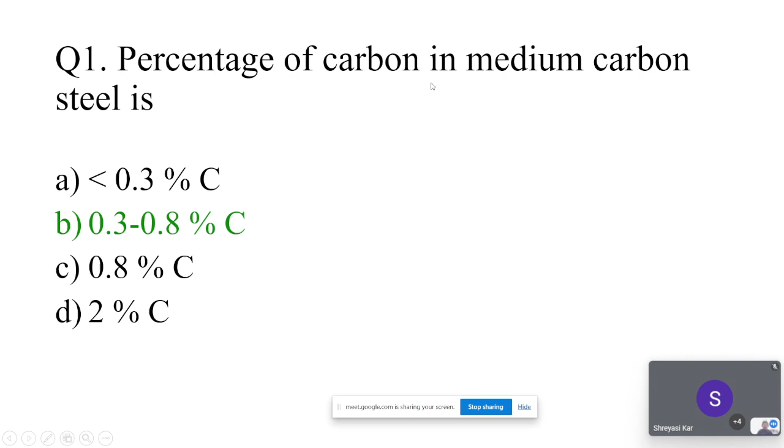What is B? You know about the percentage of carbon in medium carbon steel, that is less than 0.3, it is different. It is given in that slide itself, at what amount it is for medium carbon steel. So again, nickel is added in the steel to improve this. This is mostly a problem solving session for you, about what kind of problems can be asked in assignments, and any doubt you have is about that only.

This similar kind of question might be asked in exams and in assignments also. So our main motive is that you should get to learn. So if mostly you are here to answer, your strength and hardness... you need to see the actual answer is strength and toughness, not hardness.

This is the tricky part. You need to be very particular about your answers. Toughness is more important, this can be added using nickel. It is given in the chat. As it is a theory subject, you need to be focused on what kind of theory and properties are given in it.

So you need to be focused on the theory part. Problem parts are there, but these kind of theory parts, what can be added, these things are fixed. These are done through research. So you need to keep these things in mind. There are only a few materials that can be added, so you must keep in mind what kind of properties this material should give.

They are different, like chromium, molybdenum, vanadium. They have specific properties when they enter into the atomic structure, the molecular structure we have, the spheres. It changes their distances, the planes and slips. So it creates that kind of particular microstructure to support the specific properties.

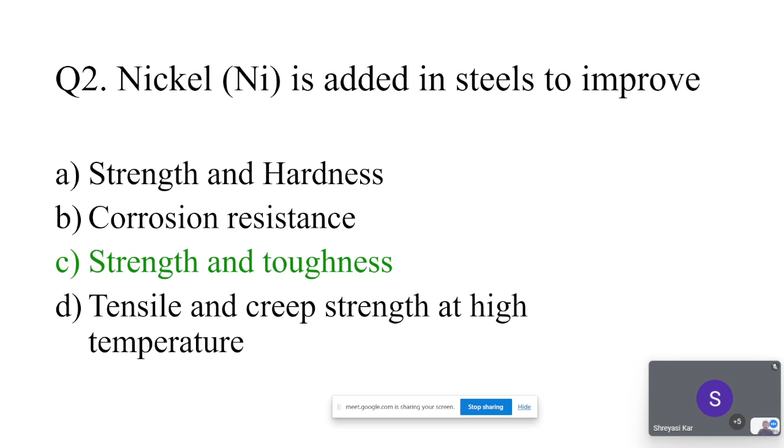This property - we need to go further in research on how things are working behind it. Okay, so let's move to the next one, I will answer this question in the next session.

This is the major alloying element in stainless steel. Yeah, it's right, mostly chromium - it is about 11%, I think we add it as a major alloying element in stainless steel. It is actually used for corrosion resistance. It forms an oxide layer, and due to this it can act as corrosion resistant. It is called stainless steel because mainly it should not be corroded. So again, this property must be taken into account - yeah, chromium is correct. So, fourth question now.

Yeah, shock and wear resistance, because it is a tool. Yeah, it's correct because it is a tool. Mostly in case of a tool, it needs shock and wear resistance because it needs to scratch. Again, the hardness part comes into the picture - it needs to scratch the material to tear the material. So all the other options are not even close to that. Shock resistance is the correct answer.

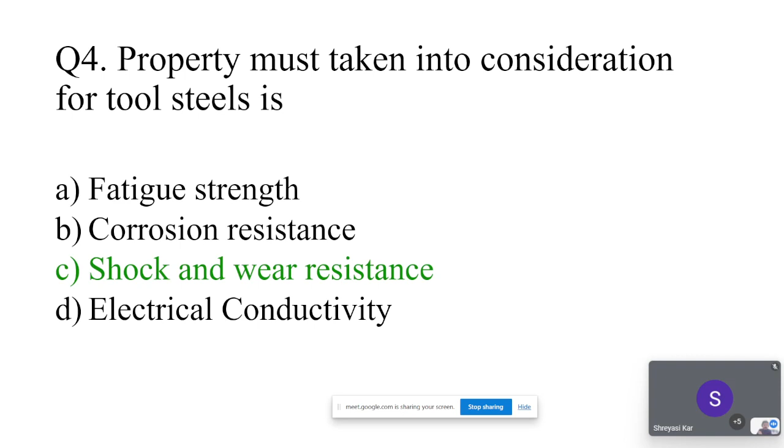We should aim for maximum efficiency and minimum cost, so our energy input should be less and our product output must be maximum. That's how we should work, and for that we focus on specific things. For specific properties, we think about how production should be maximized - that's what a production or manufacturing engineer should do with the resources available in our company or shop floor. Specific properties are given for specific tools, like in the case of tool steels, to get benefit for those specific operations - it's the shock and wear resistance we are using.

Again, the percentage of silicon added in steel is for enhancing the electrical properties.

Yes, that's correct. In manufacturing, this kind of problem is mostly asked because it is memory based, but there are small tricks you should understand since this is material science again. In material science, most of the research has already been done, so these kinds of tricks are available. You have to go through that domain to increase production when we think about these areas.

You can search it now even, but it depends. This kind of problem mostly comes in exams, and mostly we have to learn it. How the exams will be is a different part, but what's more important is your understanding from the questions or the lectures you've gone through - that is more important, that is about your learning.

So you can even ask a doubt if you want. Where is this graph - this kind of steel used with high silicon content - where is it, for electrical and magnetic properties? Is it in marine industry hatches, where they get magnetic and electric material drawn from the hatches in ships? The hatch, large - no, not the hatch, but the hooks along with cranes, where there are electrical and magnetic materials like semi-finished iron billets to pull out of the hatch and drop on the port. Is it like that? No, no, no. Where is this kind of steel used, with that high silicon content? That is my question.

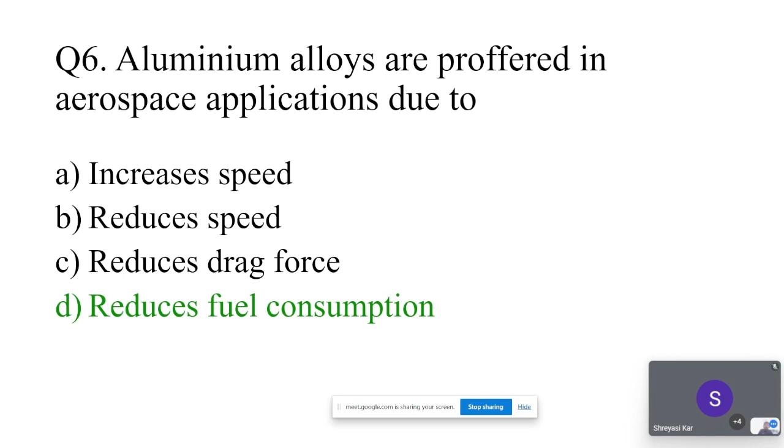That's it. Mostly the problems here are designed based on the assignments you have, so I'm not going too deep into any area. This is just the section to clarify facts. Again, this is a theory part only. The major problem with titanium in its molten state is...

It is chemically very active. I think you're slightly slow, are you searching or what? I'm not getting it, but don't search right now, you can search, but similar kinds of problems will come in the exam, so be ready to that depth so you can score more.

Also, we are mostly working to make sure you're more engaged with such small things, so you can learn more and grab more from the classes taught by the professors. Think about what mentality a manufacturing engineer should have, so we can select the proper material with the proper properties needed. The limitations and advantages of each material differ, so check what fits best and what the limitations are, and whether the material can be manufactured on shop floors or in manufacturing fields or not.

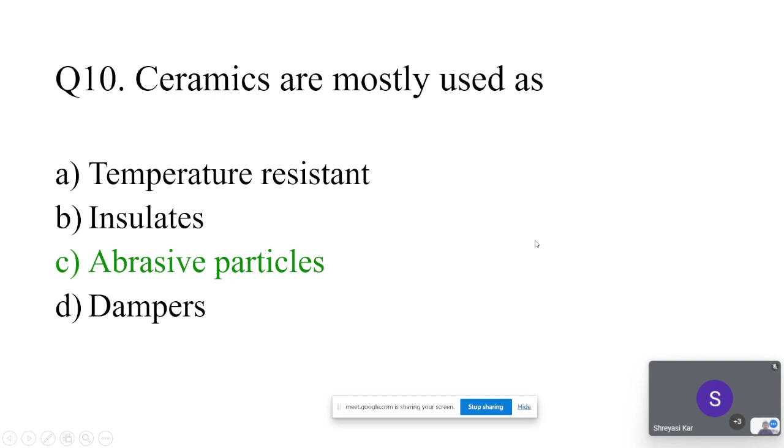Yeah, it's correct. It's carbon. Carbon is correct.

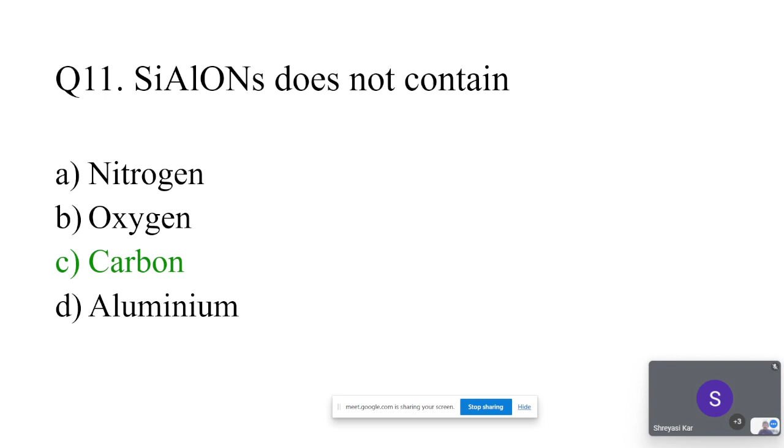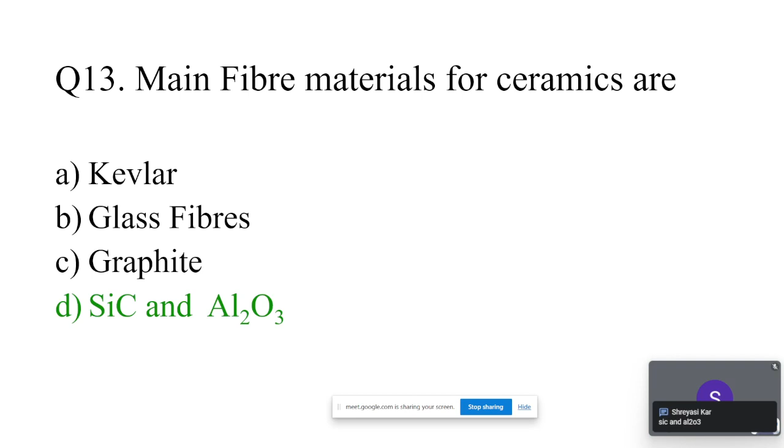So for finishing and milling, which will be the favorable property? It should be brittle. Finishing is mostly scratching metal. How would you be scratching in finishing? This finishing is mostly a grinding process. So in case of grinding, these things will not be applicable. Ductility is not at all close to it.

And milling is again a different property, different case. It is a machining problem, finishing is a machining process. So ductility is completely different there. In milling, it's mostly by cutting the material, so ductility is not part here. Mostly it's useful for how much it can deform. What is forming? Forming is you are deforming the material.

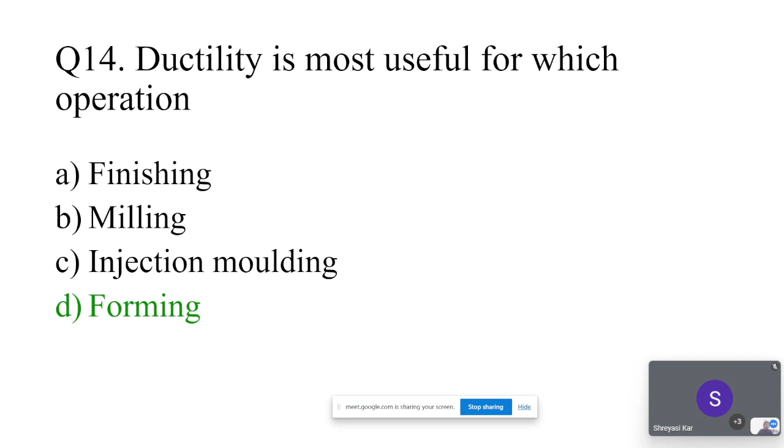That's how we can remove it in the form of chips. In milling we are doing it in the form of chips, and in injection molding it is again a polymer case. So only in case of forming does ductility come into the picture. That's it. So yes.

Yeah, it is hardness test actually. Izod is a hardness measurement test. No, not hardness, what is this? Uh, toughness. It is actually measuring how tough the material is. Impact test, Izod test, we are actually scratching the material. Like I think people know that sir is actually asking how it can be actually like this.

There is a notch, I think so. This impact testing checks how much stress. It is actually at the center, right? Not the center, it is actually half, and the rod is placed from this side, to check how much fracture it can withstand before it completely breaks. It is the Izod test actually.

So such kind of test we use for toughness measurement, not hardness. And these are like how we can measure hardness by scratching the material, using different indenters to scratch and check the level of scratching. So different scales are there like Rockwell scale, Vickers scale, scales like A, B, C. Depending upon the scale, we can know how much hardness it has.

Is this Knoop test same as the Rockwell test? Maybe internationally it is made differently, the indentation is different. In case of Knoop, it is completely square, like a rhombus like structure. In case of Rockwell, it is different. For Vickers, I think it is a cone. For Rockwell we are using a ball, and here we are using a cone like structure. For this one we are using a rhombic structure. It depends upon different indenters.

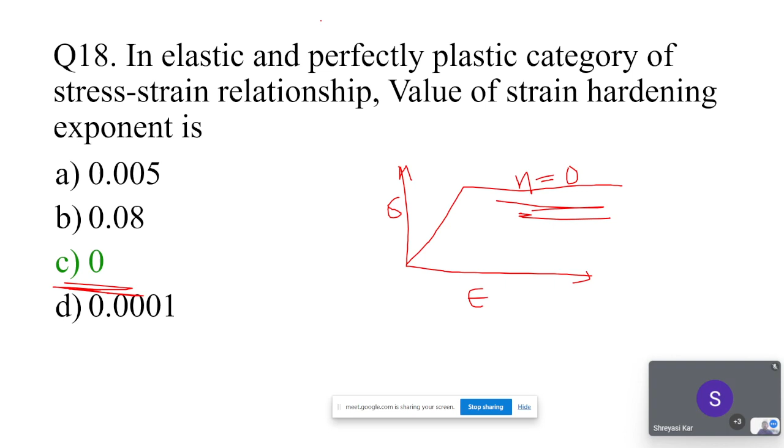So in the stress strain graph, what's the reason for the drop after the yield point? What is the case there? The elastic and perfectly plastic category of stress-strain relationship, you have to check everything. It's preferably mentioned here, what is the category? I think you need to refer to the slides again, it is in the second slide, third slide I think. It is a specific property in the elastic and perfectly plastic category of stress-strain relationship. It is the specific category that I have mentioned. From that mentioned category I am asking the question. That is the concept here.

Okay sir. Okay. Okay sir.

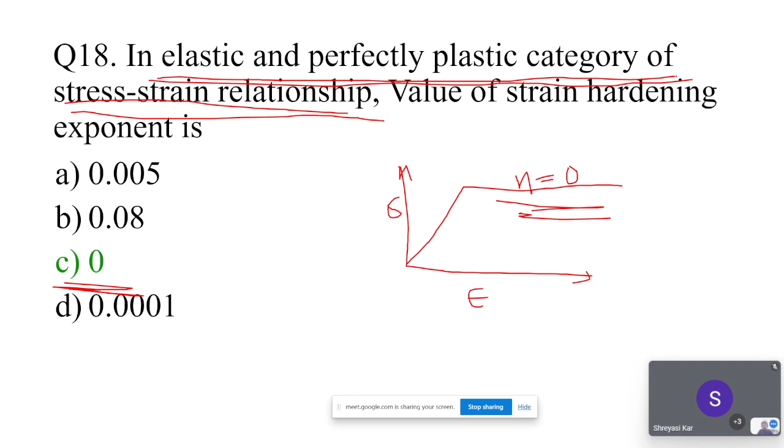That relation came from the formula, G and E formula, 1 plus mu. I don't know that actually right now, I'll go through slides only - you have to check that. Right now my focus is to get at what the relation is, not how it came about. You need to go deeper to check how it is actually coming, but right now I can't go beyond the slides. Since this is just an introductory section, there are many things you will need to get afterwards. If you go very deep at first itself, it becomes very hard afterwards, so we are slightly increasing the level.

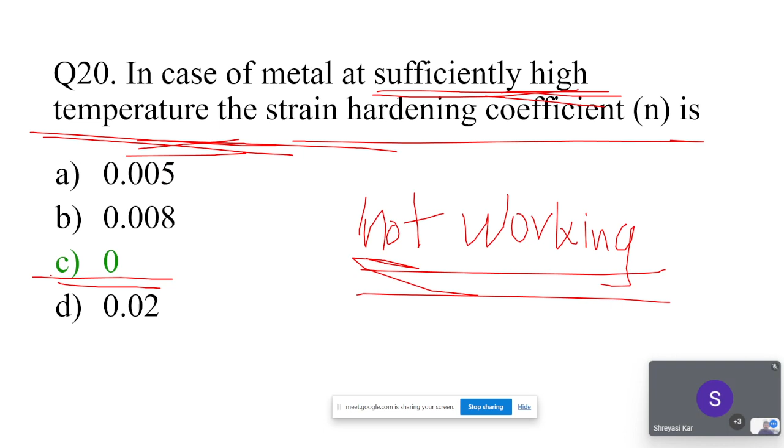Again, when we are working with materials, it comes to testing - how the test will be done. Again, this is a more typical question, it is not straightforward, it is a kindly difficult question.

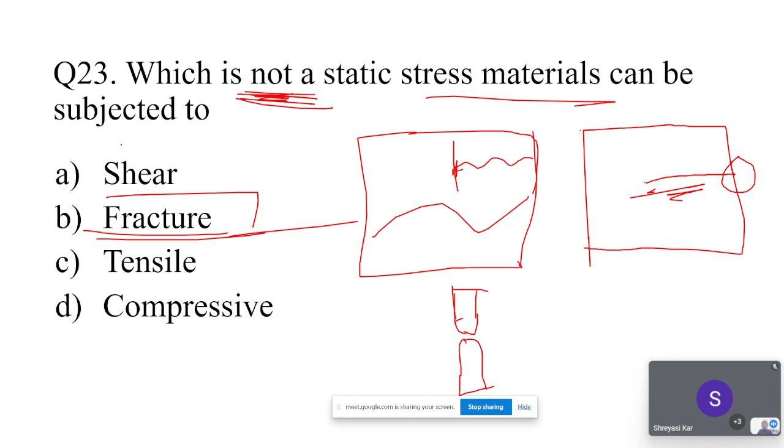Yeah, it's kind of fracture - while making also there is fracture, after making there is a fracture in the material. So the cup and cone fracture - this kind of fracture will happen. So this fracture is not a stress in the material, not subjected to such kind of stress. It is only shear, tensile, and compressive stress, and this is the fracture that you result.

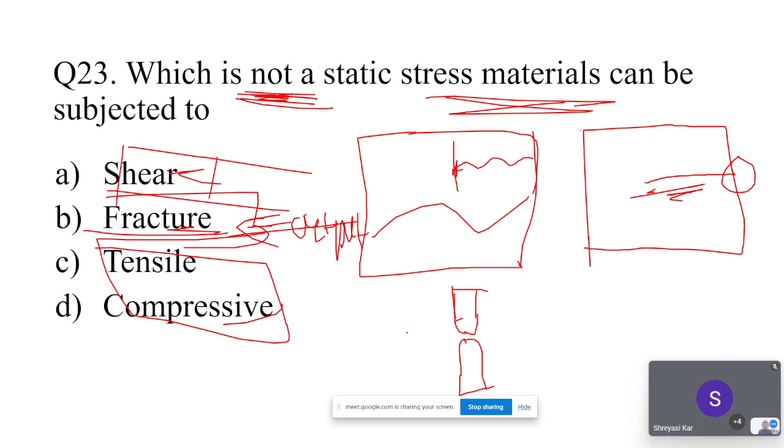The shears are actually the reason or cause for how it is happening, and the fracture is actually the outcome - that is the result of it. So it is not a stress, it is actually a result of these stresses only, and only these stresses then the fracture will happen - some kind of tensile, compressive. So this will be mostly your output actually, this is your output, and these are your inputs - these inputs are actually causing these things. So these are the different things you can specify, how it can be differentiated - this is the output fracture, and these are the inputs. So with these inputs the fracture can be possible. Fracture is there - mostly this kind of fracture happens due to these things only. This is the fracture, the correct answer.

Okay, so we are moving towards the problems now. This kind of problem will only be available mostly there in your assignments also - this kind of problems are there. So I think for 1 hour, I think we should go with this only. You can - this is not that much, but these are the important things. Most of the things are covered by the professors, I've gone through the video lectures also. So these are the things that we have, because this mechanical subject is always about calculations. What we suggest is that it's about calculations - how the things are mostly about theory and practice, it is, but it is about calculations.

Mostly in case of GATE, there will be a scale that the answer should be in, in this specific range. This is followed in NPTEL also. The answer will be within these limits, like 0.5 to 0.6. If your answer is within that, it is correct; if it's out, it's wrong. In GATE it is exactly like that, it should be between a specific range. Your NPTEL exam, assignments, and exams are examples like this only.

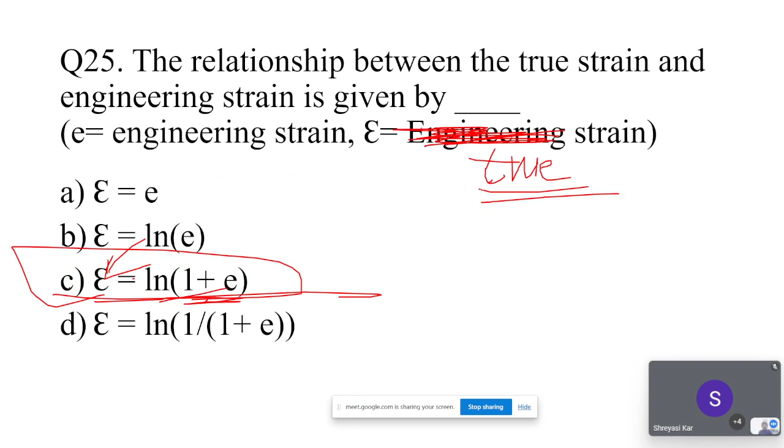And the answers will mostly be given, so it is not mentioned over here, it's in megapascal. I'll give you the answer in megapascal. No, it's too... In this previous case, it was just strain, so it doesn't have any unit, so unit is not mentioned over here. Again, when we have stress, we have to give the answer and measure the unit properly. The unit must be given there.

You people are solving or not. That is one.

What do you have? You have length, diameter, force, and elongation. So what do you need to find? True stress in this case. How can you find true stress?

So there are two more people. How can it be solved? I have to solve for you too. So this is 40 millimeter length, 8 millimeter diameter, subjected to tensile load, and 500 force. So what you have, engineering stress, you can calculate.

Your engineering stress will simply be F by A. What is F by A? Simply your 500 divided by pi by 4 into D square, the area of cross section. So it's simply 500 divided by (pi/4) into 8 square. So it came out...

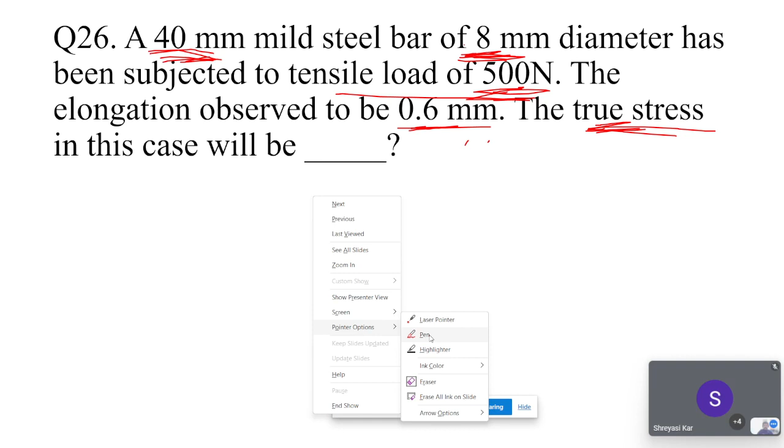You know the relationship also, you have to equate everything. Most of the times in GATE, such problems are given so you apply everything — every bit of knowledge you have, you must apply. So if you start writing with the formula you have and see how you can reach the solution, you need to check, but you are mostly just wanted to reach the solution. That's it — mostly you got engineering stress now, 9.94.

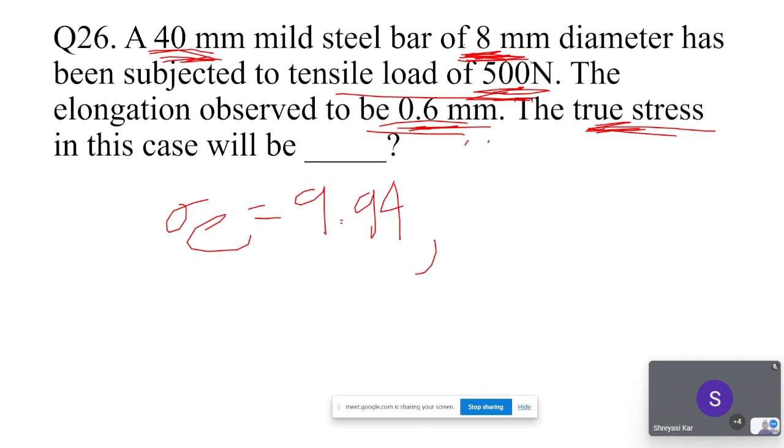And after that, elongation is given here, 0.6, and it's 8 actually. Elongation is given, that is 0.6. So what will be your strain? The engineering strain.

Engineering strain will equal this given value, 0.6, which is mostly final minus original divided by original. So it's 0.6 by 40. So again it will be 0.015 something.

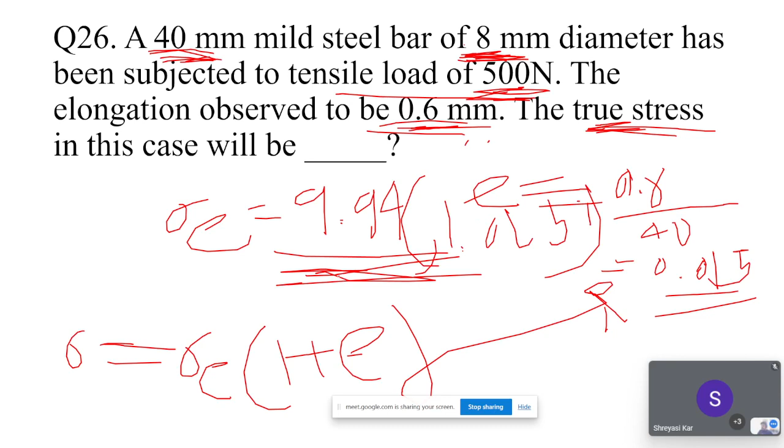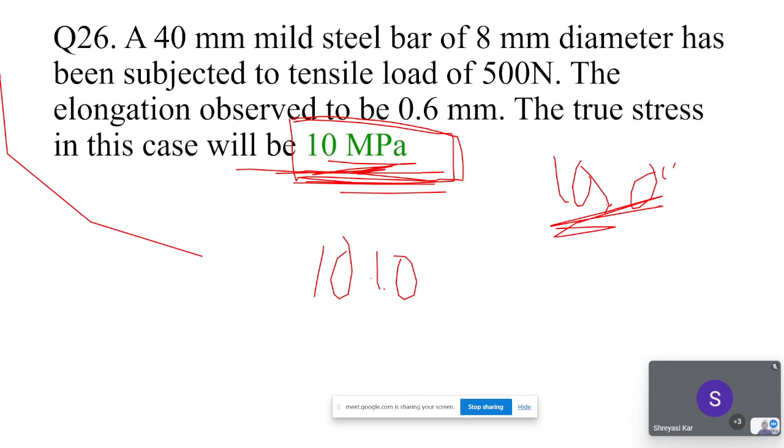And you know the relation from it: your true stress is equal to engineering stress into 1 plus engineering strain. So this is your engineering strain, 0.015. You have this, and this is your strain — just put, add, and multiply. That's it: this will be 9.94 into 1.015, which will be 10.10 something. That's how we can solve this. You have to apply everything you know. The answer is 10.10 something in megapascal — you also must mention units, units.

And this is another problem, which is transverse rupture strength. We must know the formula for this. It is the output of a bending test, from the bending test actually.

The length is given, just write what you have: you have length, breadth, thickness, and load, and you need to find TRS — it's not mentioned in megapascal. It's about how it is the output of a bending test. The bending test mostly has a cross-sectional area that resists the bending. It is about the formula, which can be resisted by your cross-section area, so you have to take care of the cross-section area too, and how the bending will happen.

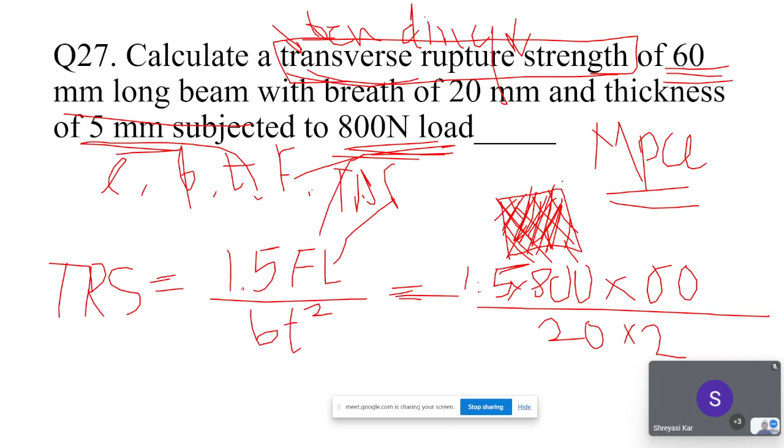1.5 into F, F is 800. So into 800, L is 60, divided by 20 into 2 raised to 5 raised to 2, 5 square it is, so it is 144. Simple calculation, put in this formula, this is the answer.

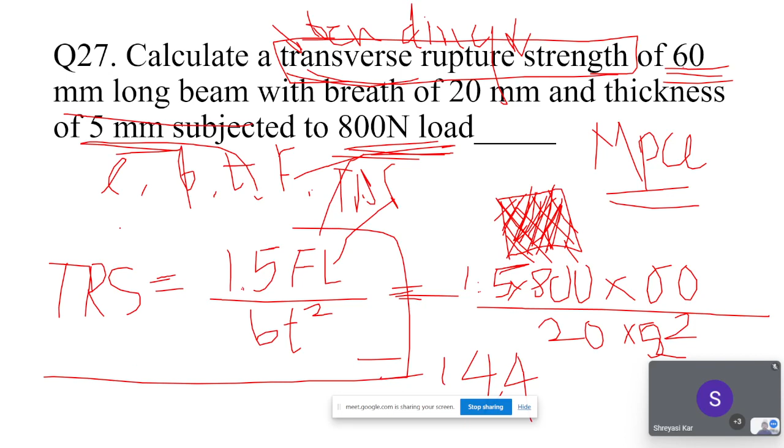This one is kind of tricky, slightly tricky question. This kind of question we have to complete in exams.

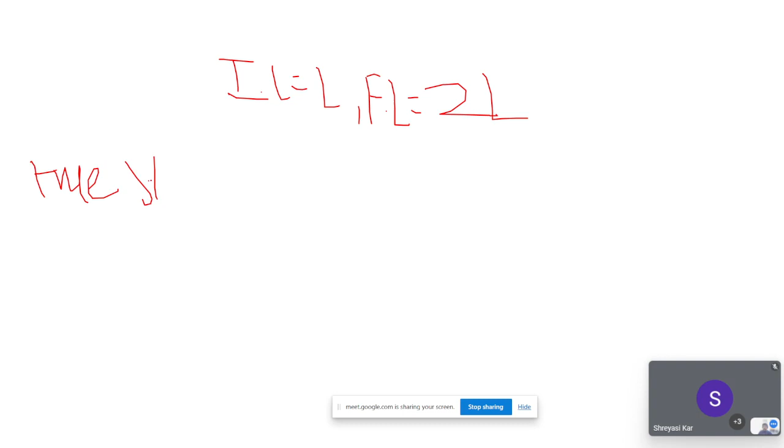Just apply the formula, you have to apply your engineering strain, true strain and engineering strain. What is true strain over here? Just apply the formula for true strain, is equal to ln of L final, which is 2L, that is final length, final length divided by

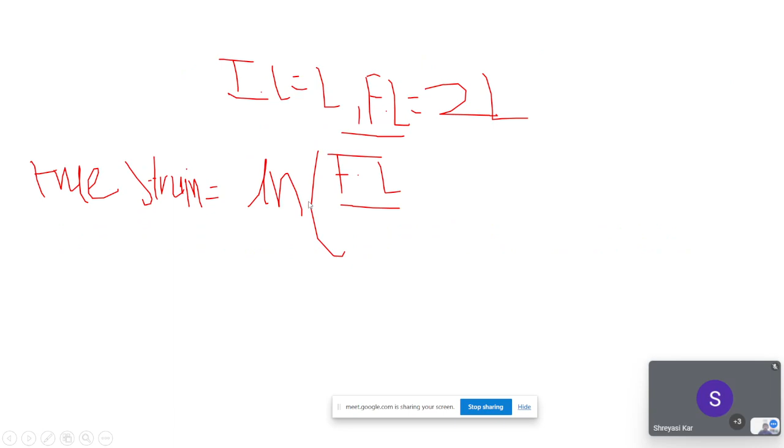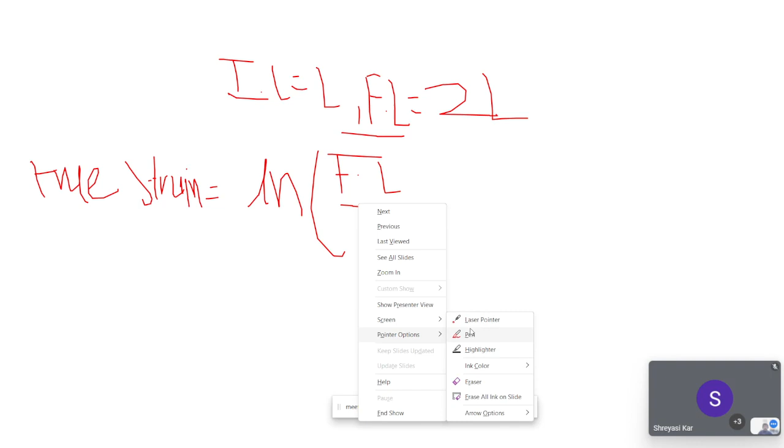Now final length will be divided by your original length, your initial length, is equal to ln of 2 by 1. So it's simply 0.693 into percentage. It will be 69.31, multiply with 100 because you're asked here for percentage, so to answer in percentage you multiply by 100.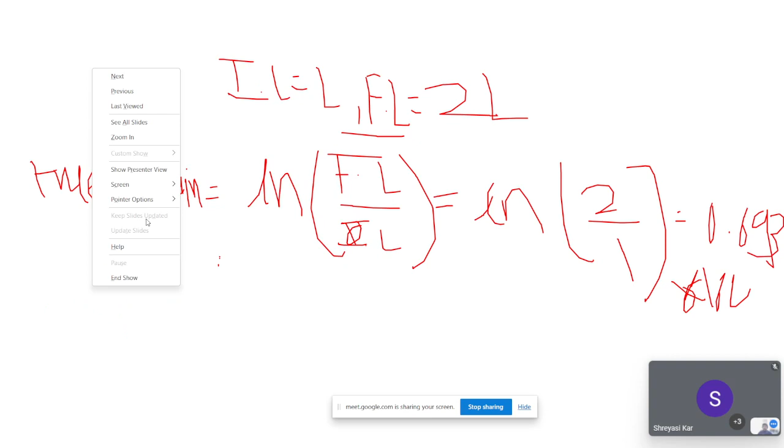Again, in case of your engineering strength, your engineering strength will be...

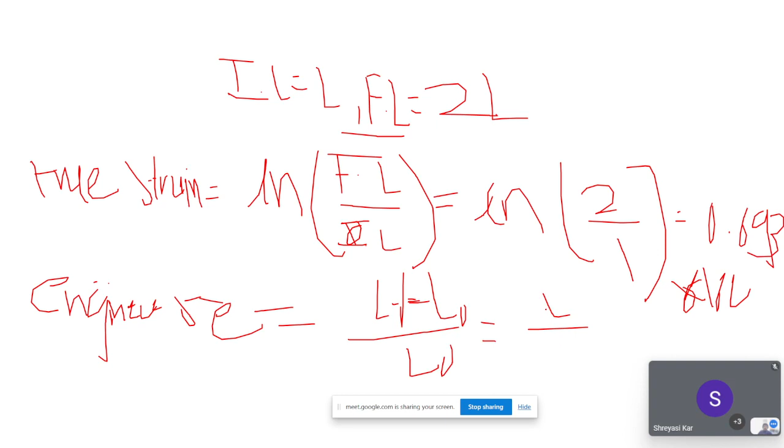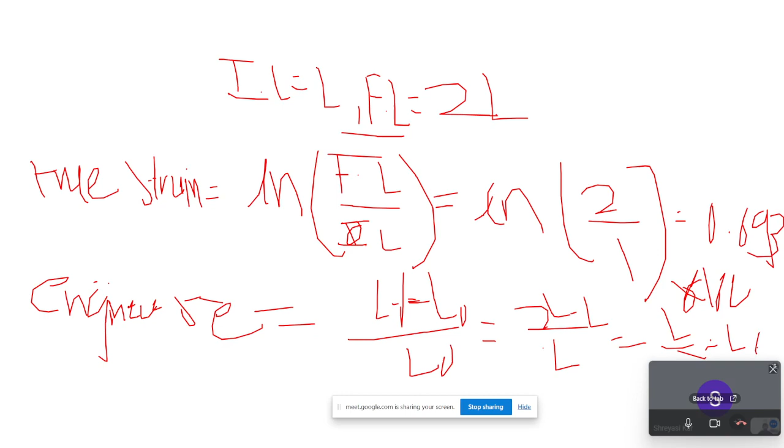That is L final minus L original, divided by L original. So it will be 2L minus L, divided by L, so it is equal to 100%. Yeah, it's 1, so that would be 1 into 100, which will be 100%, would be your answer.

The next question is slightly tricky now. But we have to check what the question has been asked and how to answer the question.

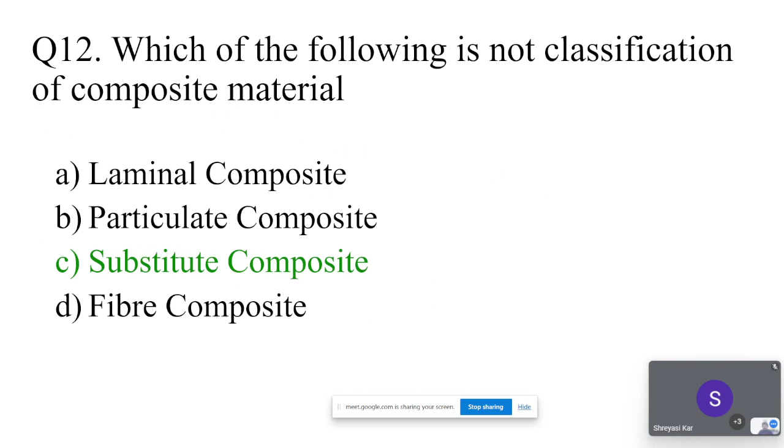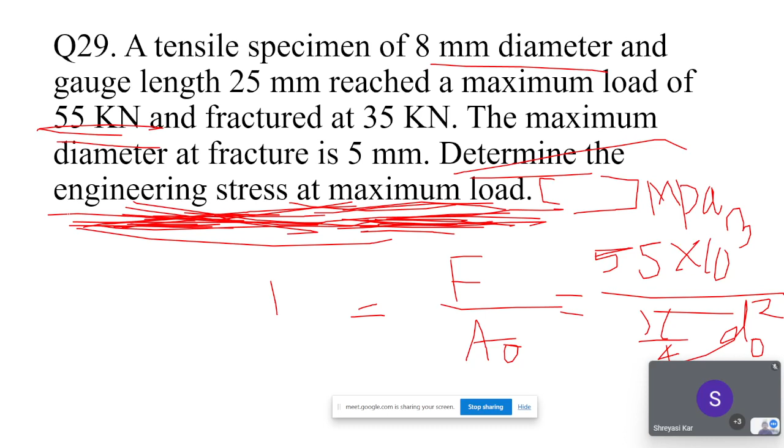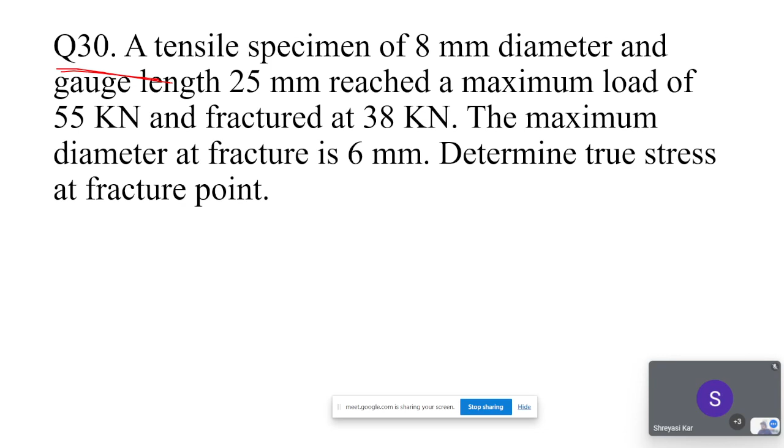So the next, it's similar like we saw previously. So answer it, stress again we are asking. It is just the previously solved question, but different.

You have to check engineering and true, where to apply true, how to apply true, and how to apply original, but not original engineering, and how it differs. You have to apply correctly what it should be. Formulas are the same that we had previously, that's it.

1, 3, 4, 3 will be more correct because it is solved by a different approach, by taking the engineering, because true - it is not that much, can't get the true value. So we are using the approach based on engineering. Mostly we should use this approach only. Engineering approach - true strain approach is not preferred.

In context, this can be right, but I have to mention something extra here. Okay, that's it. If we check, in the next session I will say what would be the correct purpose for this. So that is my difference.

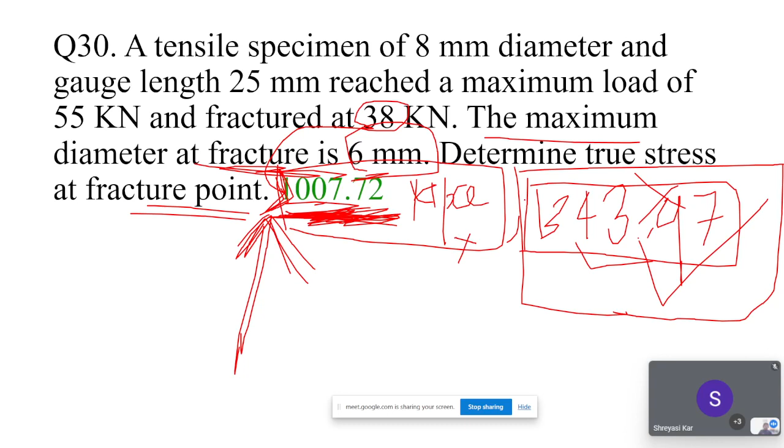This is not just a theoretical problem. Mostly in this context, this answer is right. But in real life, this is not the approach that we should use. So we should go with this engineering approach with original length.

We have force, we have original volume, original area, and you can measure the original length because after that you can measure diameter and length. But exactly at fracture, you don't know what has happened.

So both the answers will be correct. Exactly at fracture you don't know - in real life this condition never happens. So in that case, both the answers are correct. So it's the case, so you also work on this. Mostly in a problem it will be given, but you must know both approaches - how you can use them and when to use what.

In case of true stress/strain, it is instantaneous. True means the actual happening, instantaneous - that actually takes place. Yes, and in case of engineering, it is original only. Instantaneous means rapidly changing, instantly changing.

In case of engineering, we should mostly go with original. And with original, we mostly know the forces - we can handle forces, we know what amount we applied. But at fracture, we mostly don't know - at what load fracture happened, that we know.

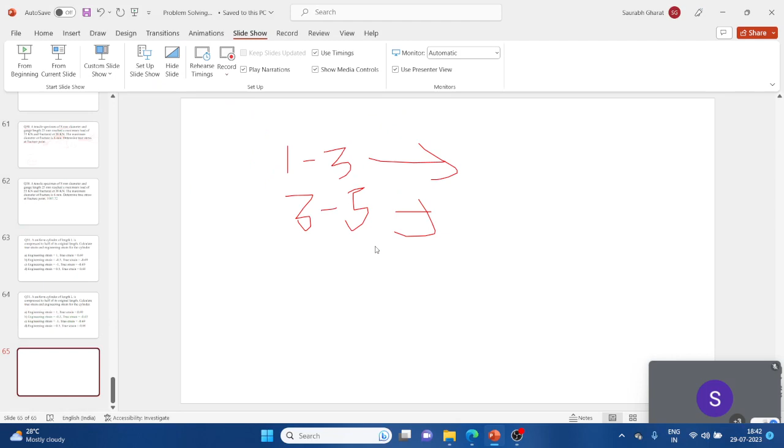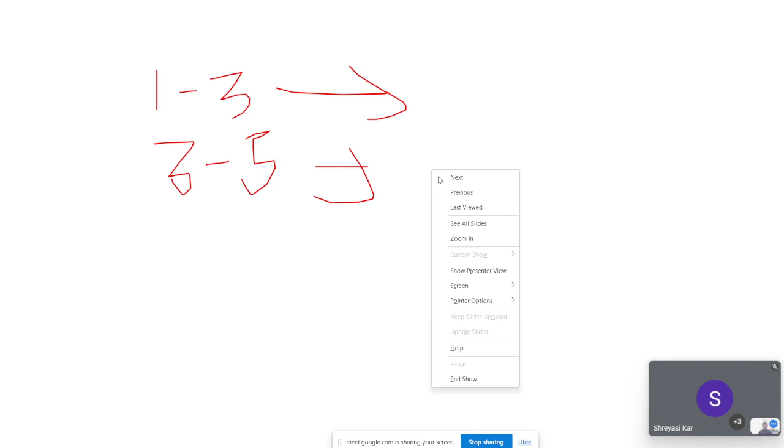This will be my first week because your assignments also structured in that way only, and this will be for second week. 3 and 3 to... no, not 3, 4.

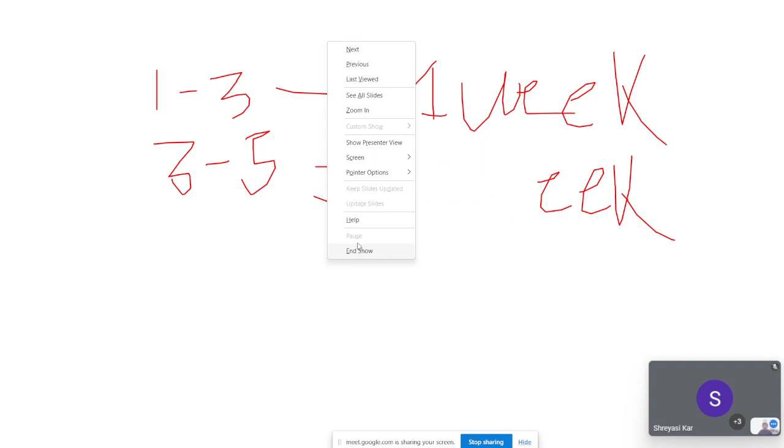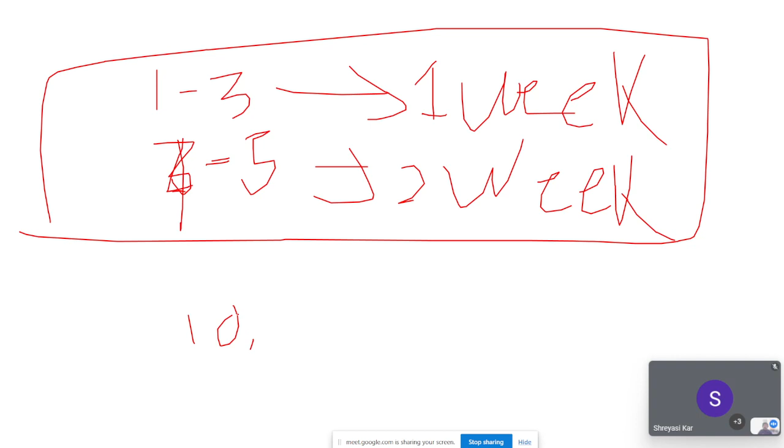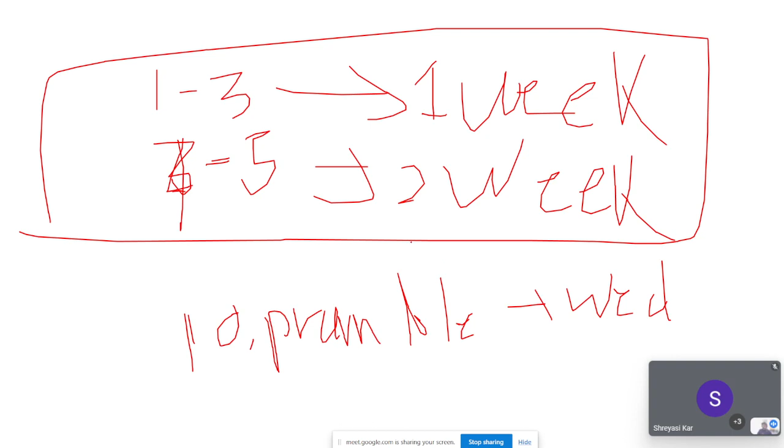4 to 5 slides for second week. Your assignments are only structured that way. You have to submit by Wednesday, I think. You have 10 problems, you also got the assignment right now. 10 problems you have to solve, and after Wednesday you will get the answer. After Saturday I will solve it, so it's like that only. So this is what problems we have, so we have to solve the previous problem.

So mostly the problem I covered is quite important, some tricky problems also like this. Mostly in reality only you go with this approach. For context of this problem you can go with this subject, but in reality you don't have to use this approach. In books also, this approach is preferred, the book I use also prefers this approach, but this answer is also correct.

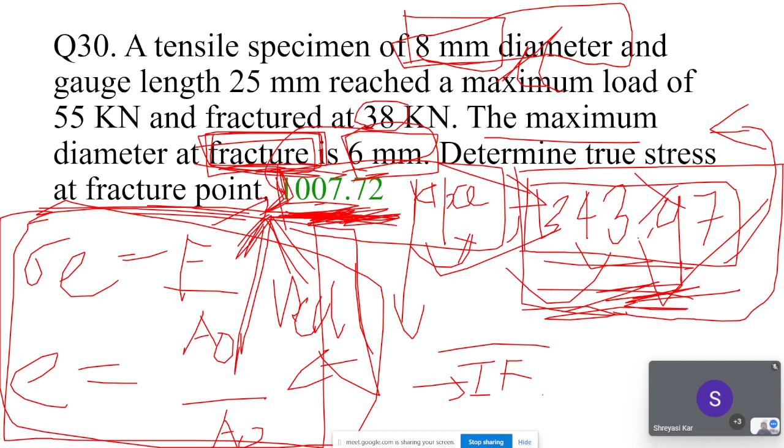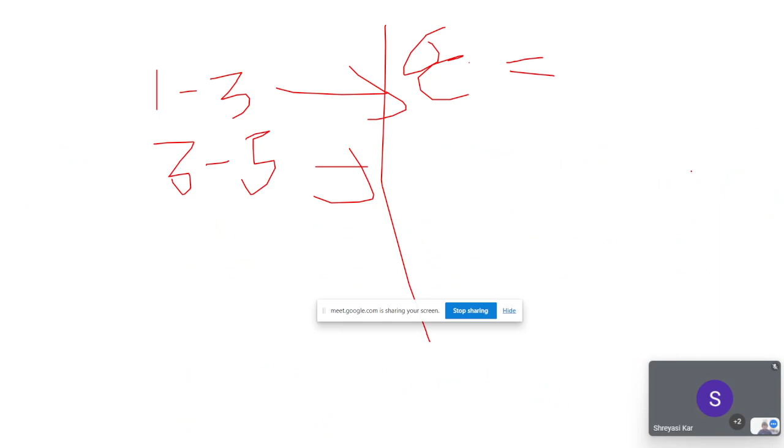Like question 31 to 32, we can have because it's kind of problematic, that previous question, but like in 32 we can solve. So if you see what you have here, it's very simple.

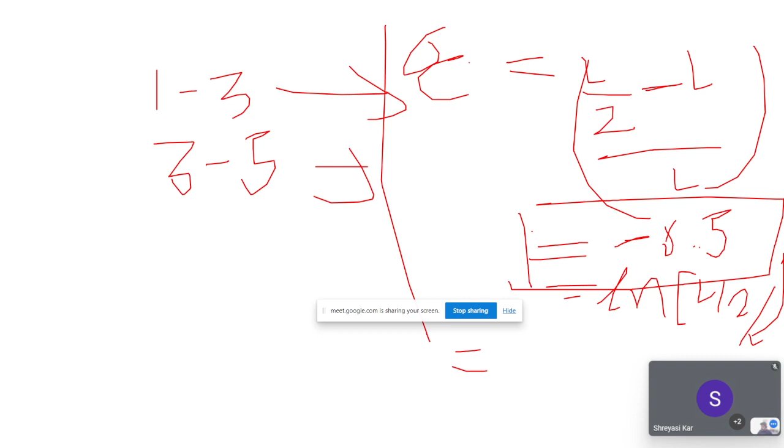L by 2 minus L, by L, which is again equal to minus 0.5, and your true strain will be equal to ln of L by 2 divided by L. Okay, it will be ln 0.5. This again is minus because it is L by 2 minus, so it's minus 0.5, and it is a compression, so its minus sign will be there as always. Because it is a compression, and in both cases from the negative side you can get it is compression. So if it is positive, it will be tension, and if it is compression, negative sign must be there.

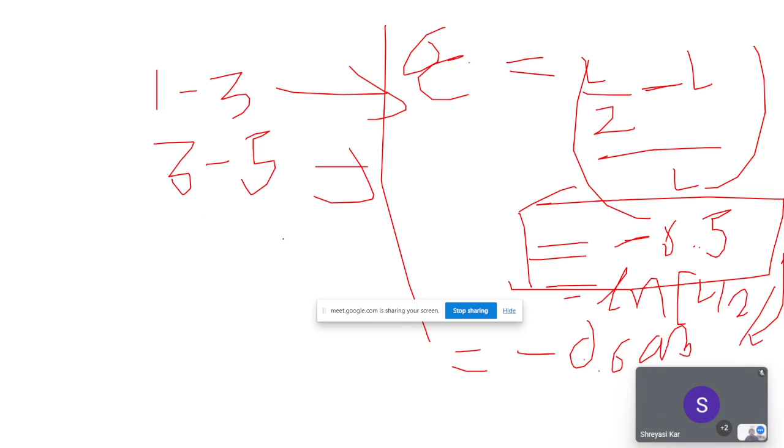Okay, so we form problem 32 here. Use F as 800. Go, this is exactly the same as everything. Just use force as 800 Newton, your length will be 0.5. Oh no, take 5 millimeter, that is your initial length. And find the true stress.

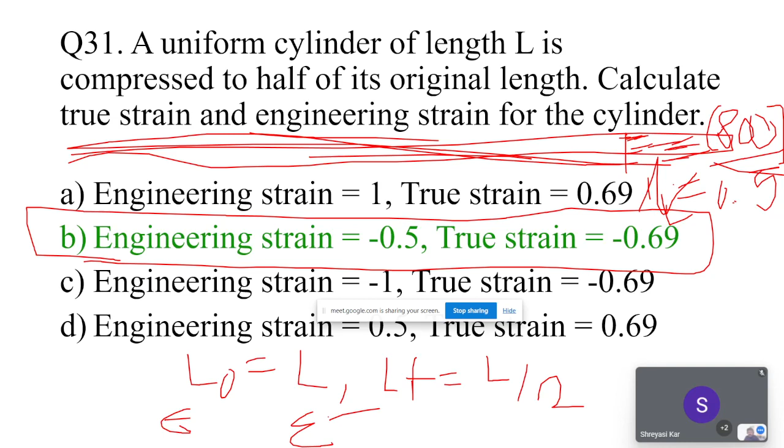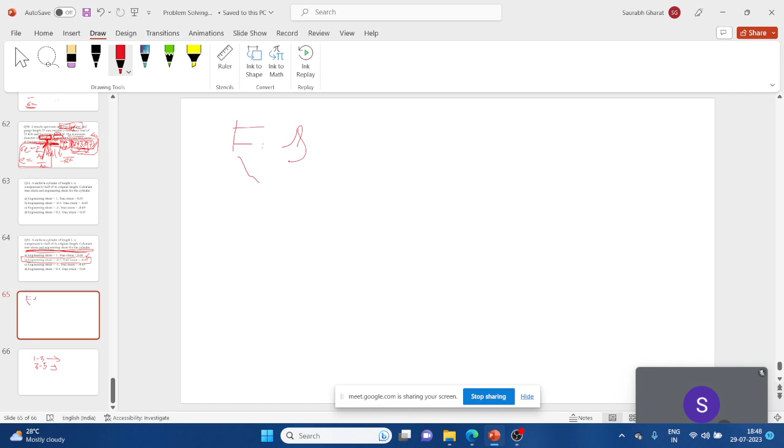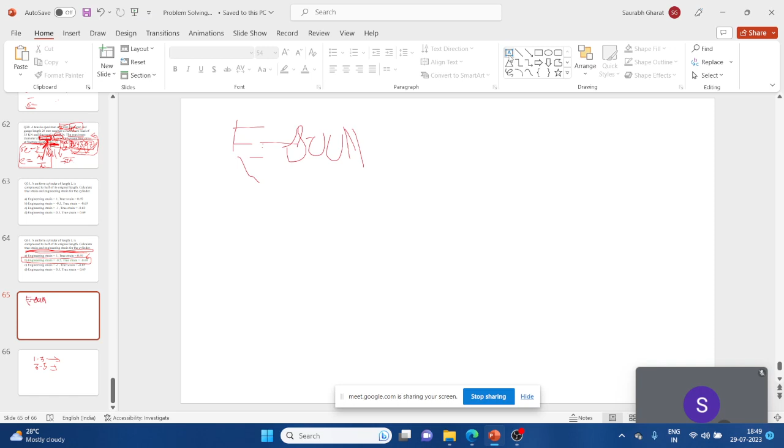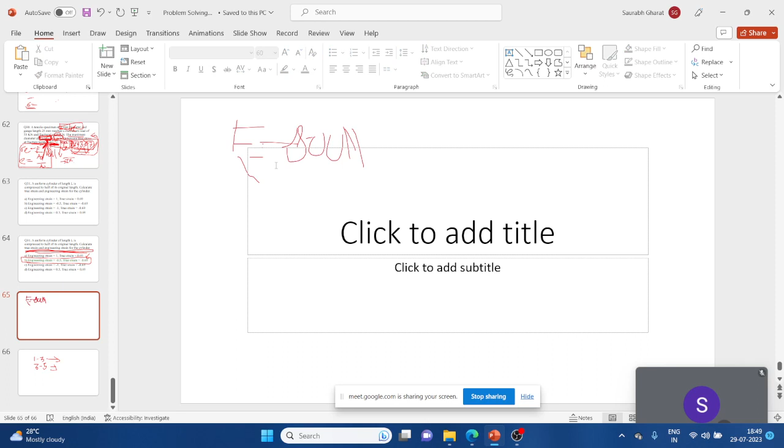So in this case also, just need to add one slide. Just like formula, what we have here, F is equal to 800 Newton, that's type also. We have F is equal to 800 Newton for original length equal to 5 millimeter. Just use the same formula to find true stress.

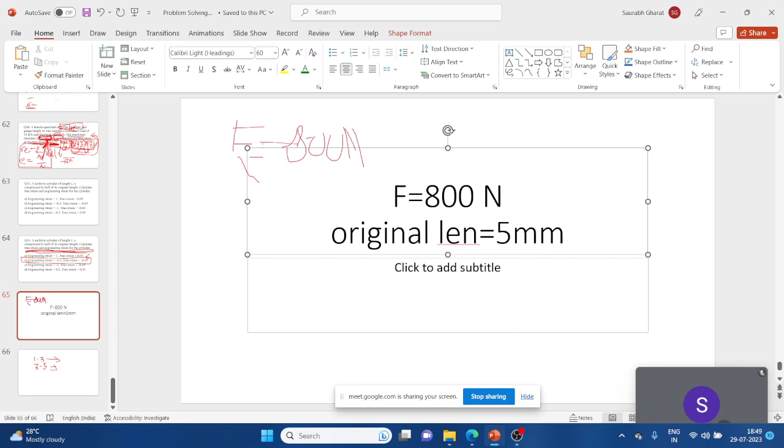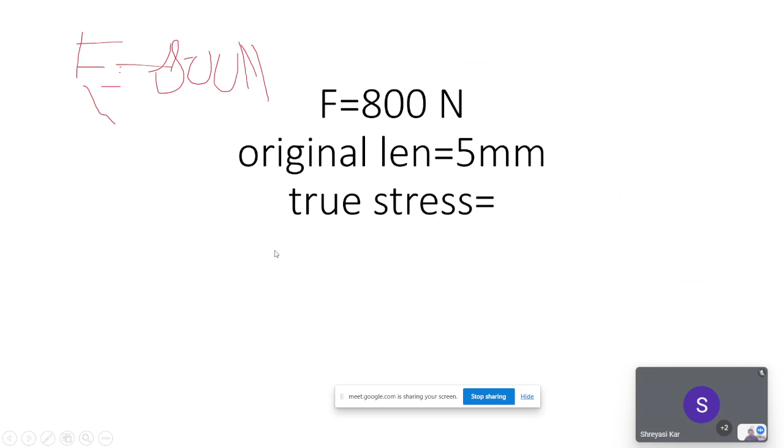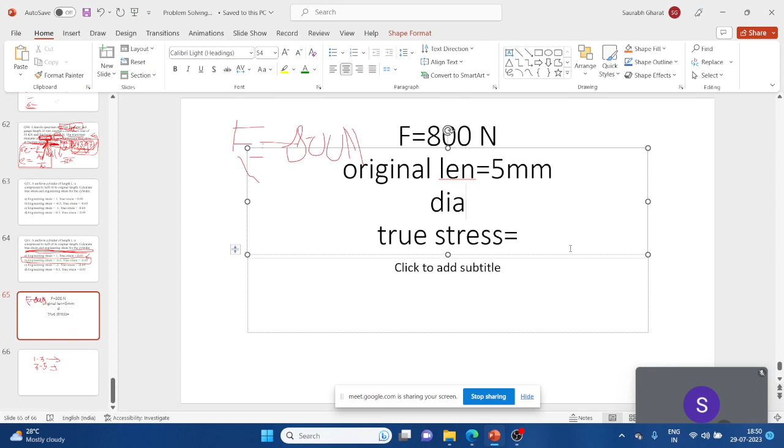I will solve that now using the same previous approach. You know F right now, so you can find engineering stress. Diameter of a tube—diameter is not mentioned earlier, so maybe it's 6 millimeter. We can take the original diameter.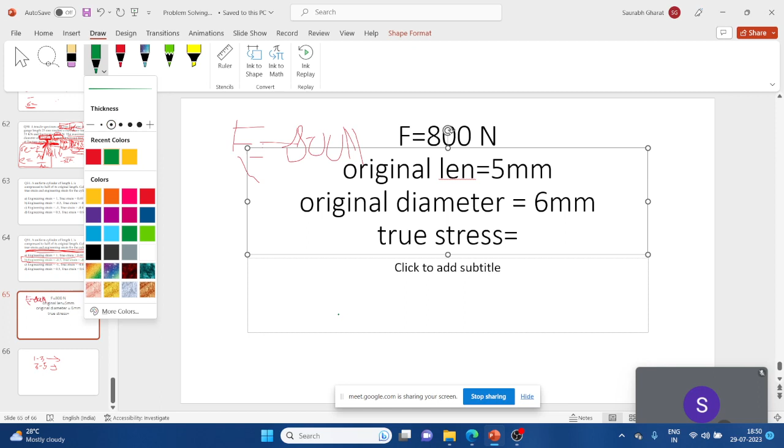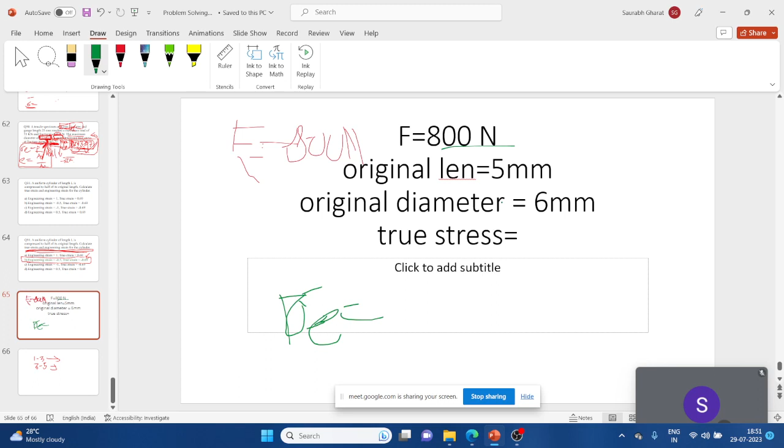So you can factor, you can find from the composition ratio, and we can find F using this principle. Exact same concept you should use: engineering stress should be found from this force you have and the original diameter you have, so it will be F by pi by 4 d square.

And you can find engineering strain also. It's LF minus LO divided by LO. This is E.

After that you can find your engineering stress, true stress that is sigma E into 1 plus E. So we have to find the answer in megapascal again.

So we just calculate the answer. It will be 800 by pi by 4 into d square, d will be 6 millimeter, the original diameter.

And you know what will be the final length. Final length will be equal to 10 millimeter—no, it's 2.5, because we are going into compression now. We just extended the problem; we have time right now, so we can extend slightly.

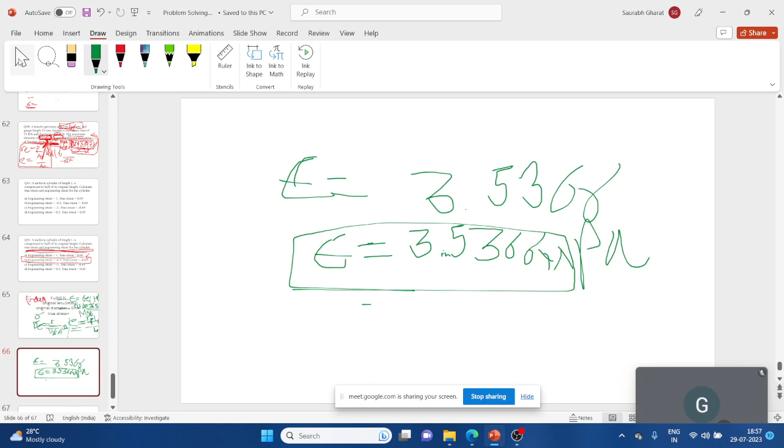To find the true stress, isn't it? Find true stress. So it's sigma. Just sigma—it's true stress. You have to find true stress.

And true stress answer we got, which is a sigma actually—sigma E, you know, engineering stress. We can also find that the true strain will be ln of LF by LO. So we find ln of 0.5, -0.693. So this is the answer we got.

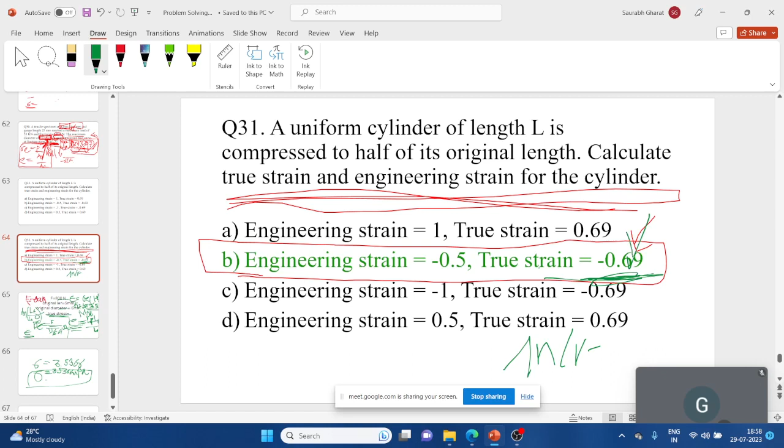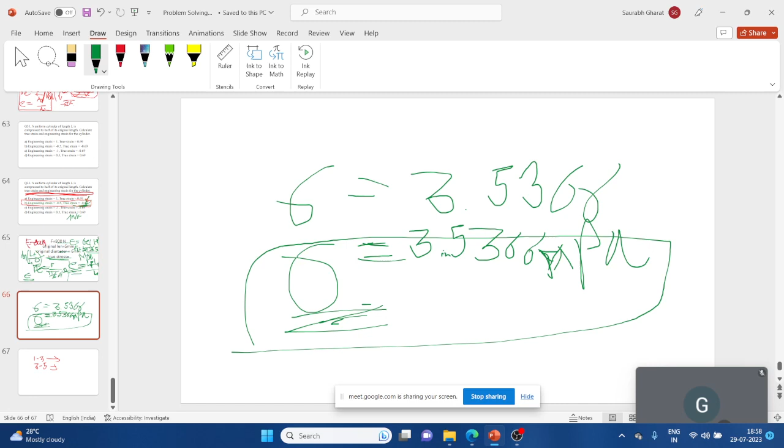And here we find out what is true stress, sigma in megapascal, for this condition. So here your answer will be 3.536.

So just write here what is the answer: 3.53665 megapascal.

So solve this kind of problems also. I think I have taken every kind of problem with you right now—what is solved, what is important. The rest of the things are quite simple. So from the first week, I can say that this will be enough.

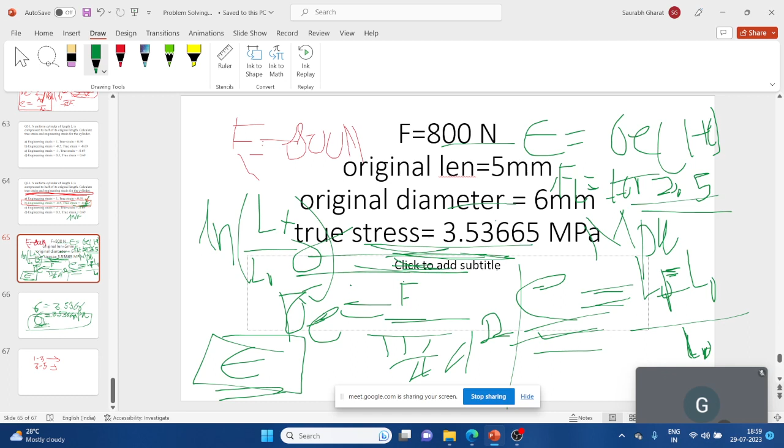So this will be your final answer. So by doing everything, what you got is this answer.